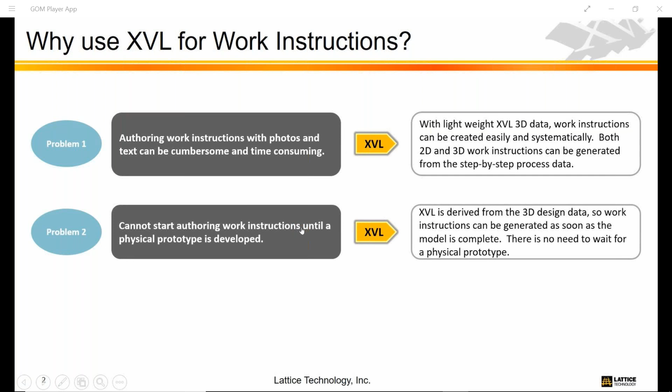Also, traditionally, you can't start authoring the work instructions until there's a physical prototype to be photographed. But XVL is derived from the 3D design data, so work instructions can be generated as soon as the model is complete. There's no need to wait for a physical prototype. Also, traditionally, it's difficult to update work instructions when the design changes, and difficult to reuse work instructions for different models. But Lattice tools make it easy to update XVL-based work instructions when the design changes, and to reuse the same instructions for different models.

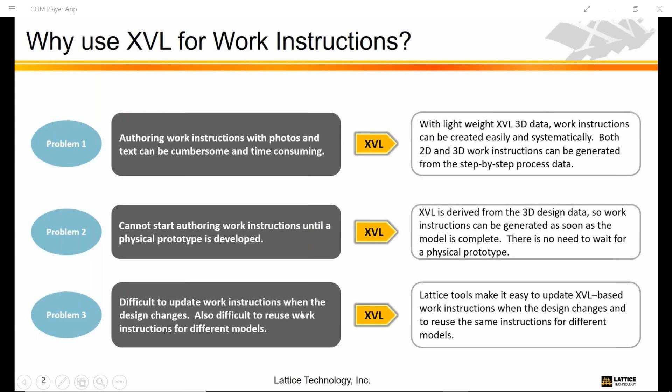So how do you create work instructions with XVL? Well, the first step is to convert the 3D design data into the lightweight XVL format. From there, you're going to create a process tree. As we will see, this enables you to easily create 3D animations and 2D illustrations, as well as to publish 2D and 3D documents, and then also easily update the model and the process data when the design changes.

The first step is to create the process tree, which is a step-by-step list of tasks. These tasks contain detailed text instructions, parts lists, and additional attributes.

You can use the process tree to create 3D animations or 2D illustrations. Once you've authored all of these, you can save them back in the XVL file, and use this XVL file with other Lattice tools to publish your 2D and 3D documents. These can be in Excel, HTML, or 3D PDF format, and viewing is free with the XVL 3D viewer.

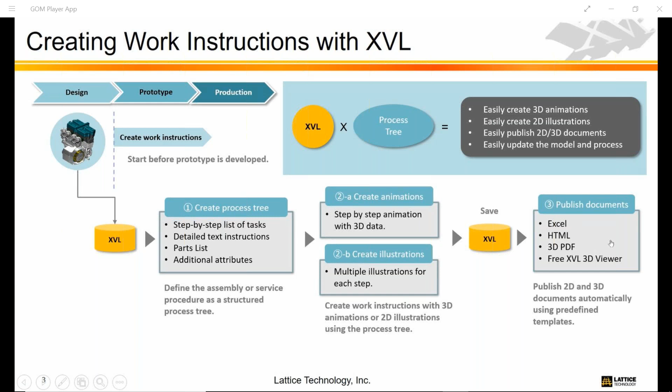Finally, when there's a design change, you can use the Lattice tools to auto-update the XVL model and the process data.

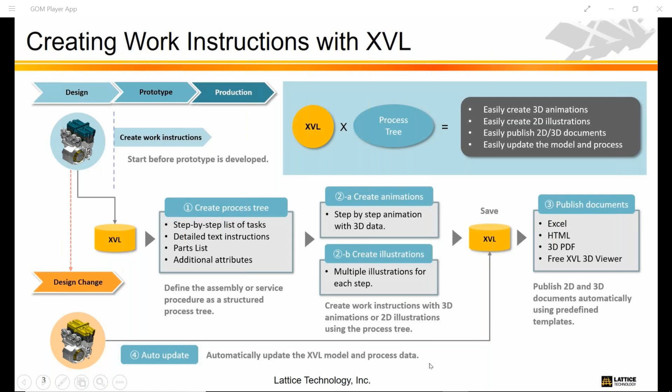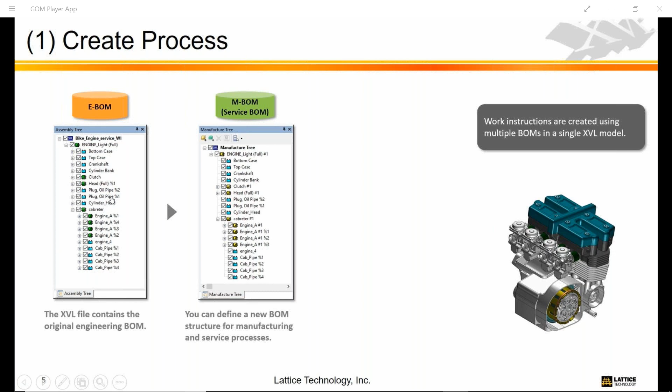The first step is to create the process tree. When a file is converted to XVL, it contains the original engineering bill of materials. Lattice tools enable you to define your own bill of materials that could be more appropriate for manufacturing or service processes. Once you've created your MBOM or service BOM, you can use this information to build the process tree, which is a step-by-step list of tasks to perform the procedure.

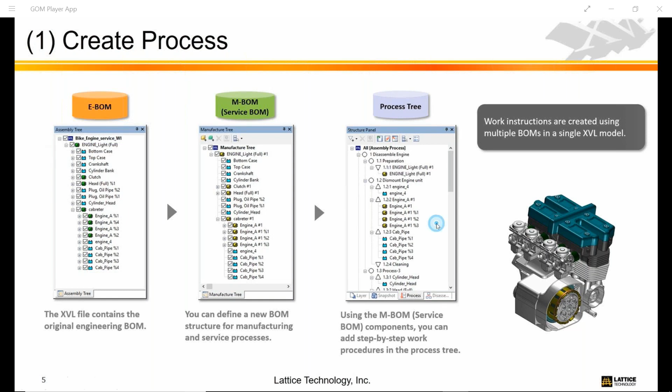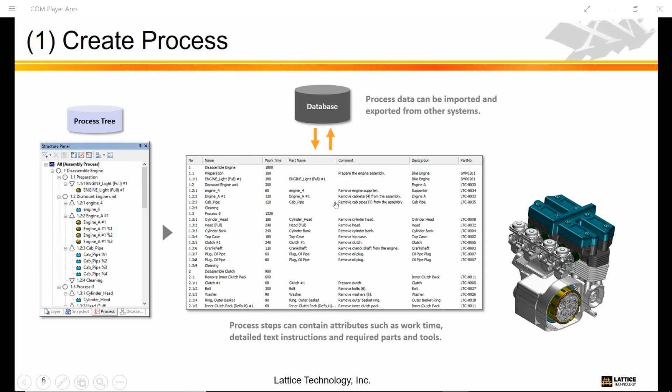The process tree contains not only the parts required, but also additional attributes such as work time, detailed text instructions, and required parts and tools. The Lattice tools allow you to author this information manually or to import and export this data from other systems. Let's see how this works.

Here we have a model of a bike engine in XVL Studio. We've just converted the 3D CAD data to XVL. So here we have the geometry and an assembly tree, or EBOM, but we don't have a manufacture tree, or MBOM. Let's go ahead and create one.

We can do that by simply dragging and dropping parts from the assembly tree, or EBOM, to the MBOM, and we can do that in any order. Or, if we like, we can initialize the MBOM as a copy of the EBOM. And here we have the whole thing here.

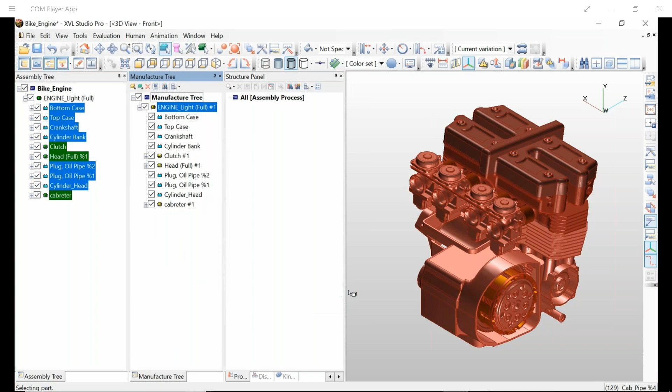No matter how we create the MBOM, it's independent of the EBOM, so any changes we make to the MBOM won't affect the EBOM, and vice versa. For example, if we want to rearrange parts, we can do that without affecting the order of parts in the original EBOM. We can also add manufactured parts specifically to the MBOM to represent things like consumables during the assembly process. We can also add specific manufactured assemblies to gather parts together into manufactured kits. And again, these changes to the MBOM won't affect the EBOM.

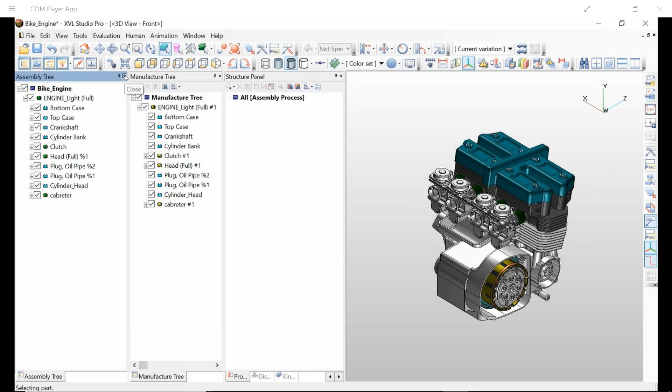After building the MBOM, let's go ahead and hide the EBOM since we won't be using it. Now let's go ahead and build the process tree. We'll start by adding a base process, and then we'll just drag and drop parts from the MBOM onto the process tree.

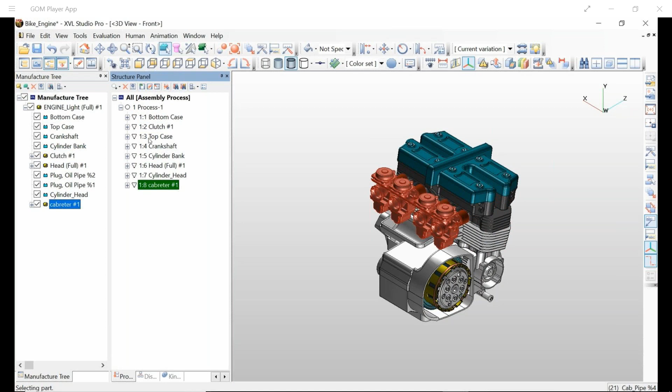We can do this in pretty much any order because we can easily check it later. All right, have we missed any parts? Sometimes it's hard to tell, so let's take a look and see. Okay, this tool tells us that we missed a couple of plugs here. Let's go ahead and grab those. And let's check it again. No items found. Okay, so we've now accounted for all the parts in our process tree.

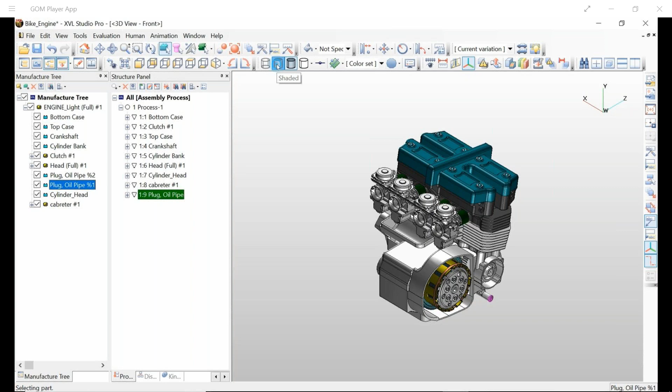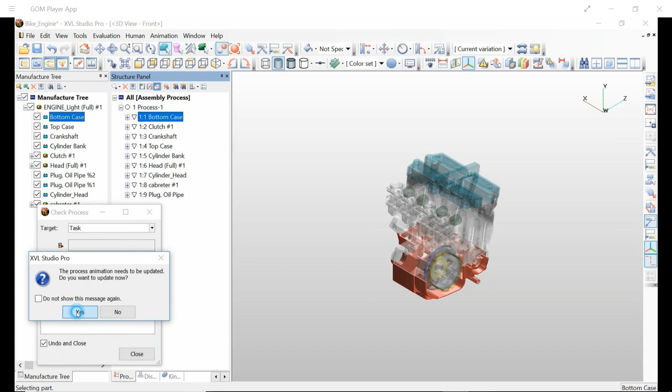Now let's check the order of operation. To do this, it's probably easier to visualize if we turn on opaque selection. Let's start here with the bottom case and step through the process. Okay, it looks like the crankshaft's out of order here. So let's close that and move it in the tree. Okay, start again. Okay, that's much better.

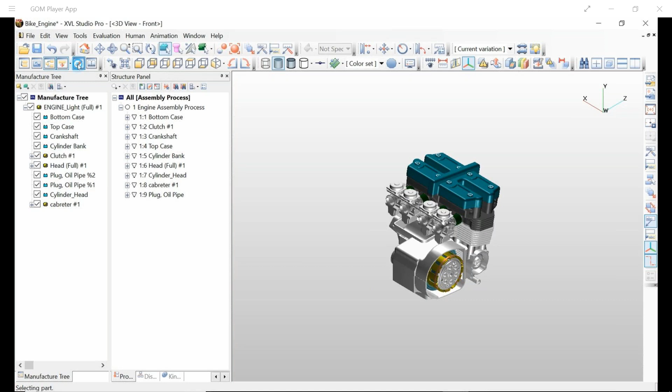When the process tree is complete, it gives us a step-by-step list of instructions for assembling the bike engine. Studio also allows us to add additional information to each of these tasks. For example, we can assign a work time for each task, and Studio will automatically add up the work time for the entire process. We can also author comments and instructions. Studio even allows us to import information from other systems, as well as export our process information to other systems.

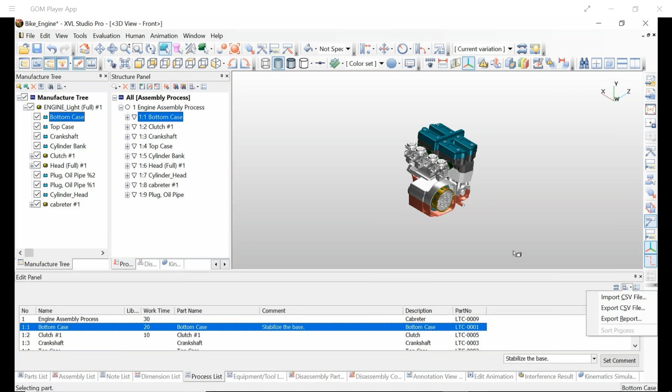After you've created your process tree, you can use it to create animations. Lattice tools make it easy to create step-by-step animations for processes. Simply move the parts and save the positions to create the animation path. You can even add images and text to the animation, and animated components can be highlighted during playback.

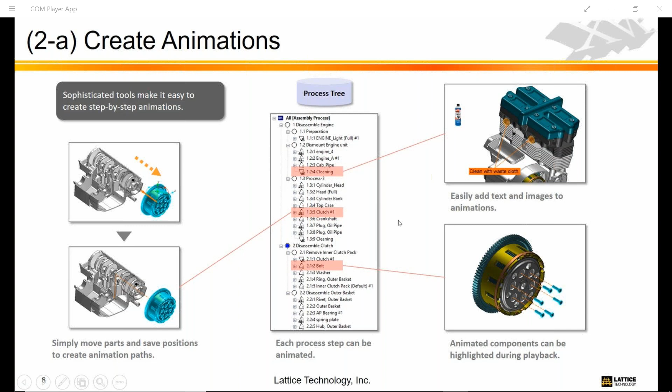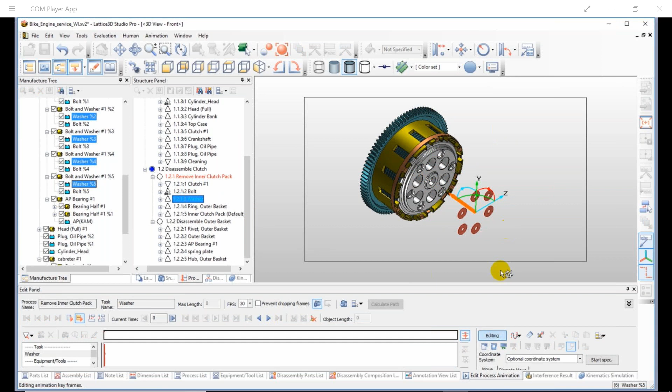Here we're defining an animation path by moving a part and saving points. We took the engine top off, going up and sideways, and now the animation follows that path. Here we've extracted the bolt, and the washers, and now the ring. You can also add images and notes to your animation.

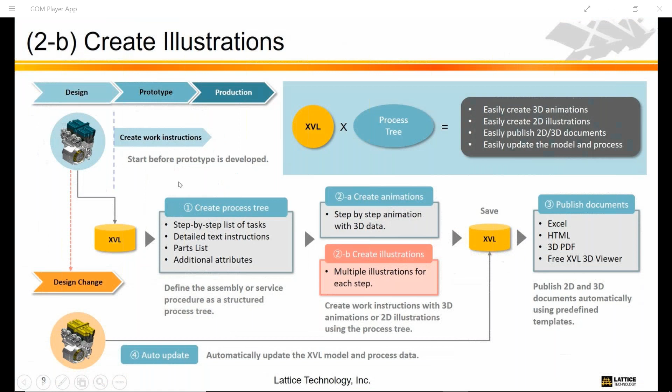The process tree can also be used to create illustrations. Lattice makes it easy to create 2D illustrations from the 3D model. Simply move the parts to lay out the illustration. You can also easily add notes and images to the illustration.

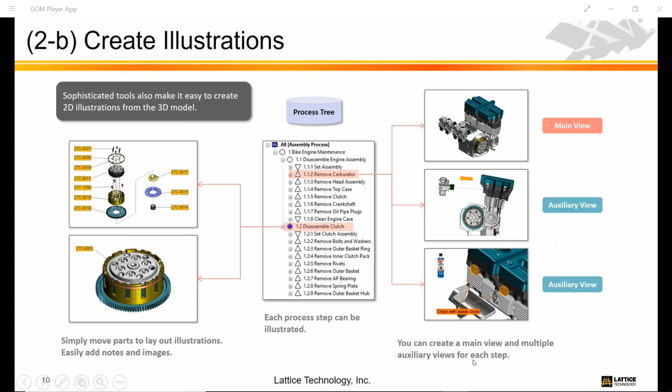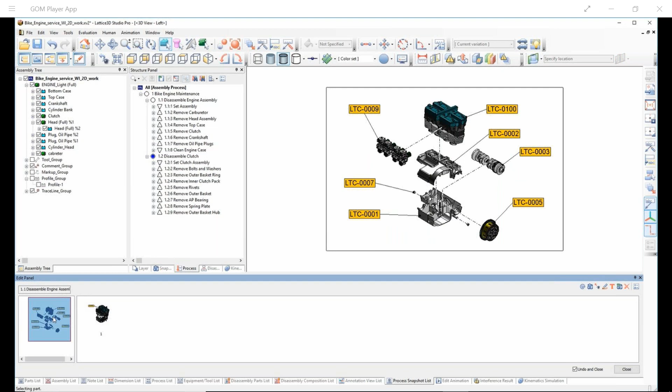Within the process tree, you can create a main view and multiple auxiliary views for each step. Here are some examples of creating illustrations in Studio. You can see you can move parts, add notes, and even create cross sections for your illustration. And each process step can have a main view and multiple auxiliary views.

After you've created your process tree, okay, let's go ahead and pause it right there.

Mark, do you have any additional polling questions? Let's see if I can operate this one right. So if you could take a minute, let us know what CAD system you use. And if you don't know, just select other or you don't know, if it's not one on the list. I'm going to let this go for just a couple more seconds. And the people at SOLIDWORKS are going to be glad to see this.

So 38% using SOLIDWORKS. Okay, very good.

And let's do one more, Mark, and then resume. Mark just talked about creating these assembly work instructions, the MBOM, all that's tied together. So how do you currently create assembly work instructions? Are you using general purpose tools, Microsoft Word, Excel, PowerPoint, Adobe, or are you using tools from your CAD or PLM supplier, MES tools, or other?

Okay. A lot of you are using general purpose tools. Give this just a couple seconds more. Looks like that's pretty much it.

And let me share those results. So a lot of people, as we find, oftentimes are using just how do we create this documentation? We just use common tools, cut and paste, and build them out. So Mark, I'm going to hide this poll, and it should be back to you now. Here we go. Okay, thanks, Mark.

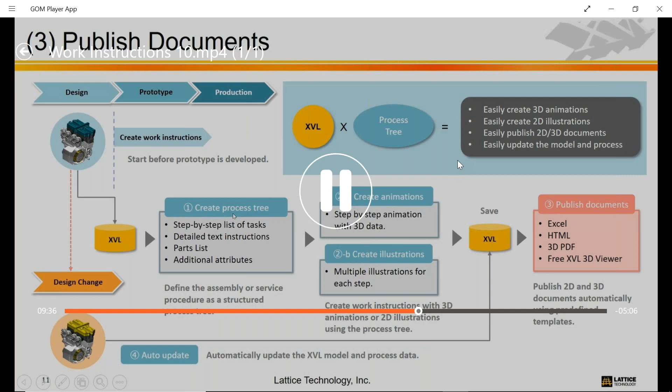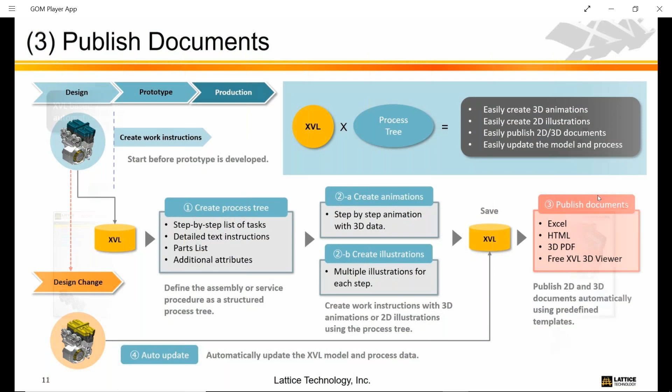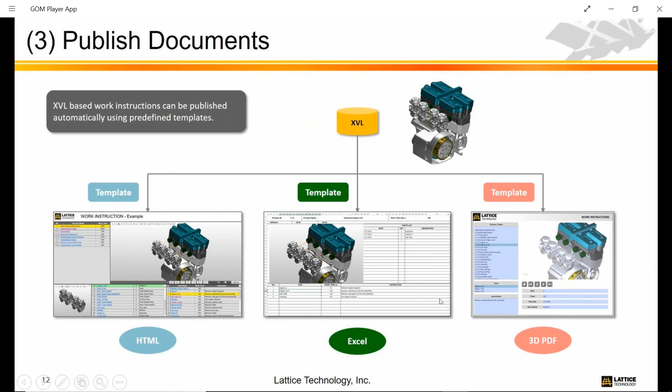Let's continue now. Authored 3D animations or 2D illustrations, you can save all this information in the XVL file. Then you can use this XVL file with Lattice tools to publish your 3D or 2D work instructions. Lattice tools can automatically publish work instructions using templates in several different formats, including HTML, Excel, and 3D PDF.

Here's an example of 3D work instructions in HTML. All of the views are cross-linked to each other, so selecting in one highlights the part or the part information in the other views.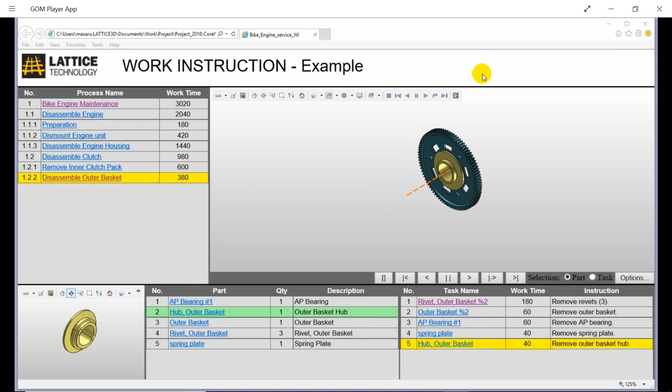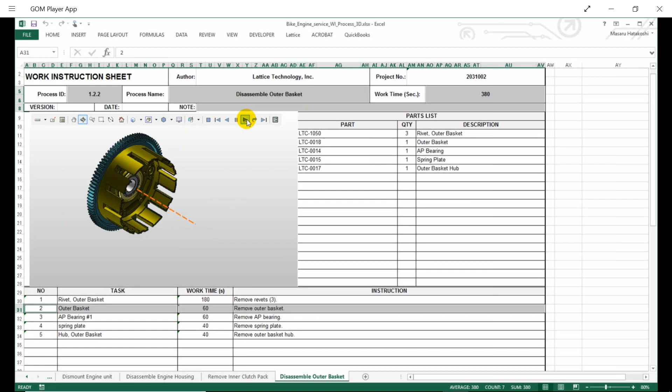Here's an example of 3D work instructions in Excel. Again, you can see an animated 3D view as well as parts information and process list. As the animation plays, the different process steps highlight.

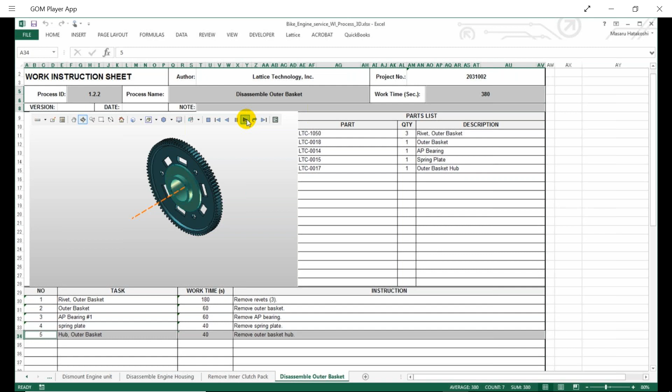And here is the same animation in 3D PDF. Again, there's cross-highlighting between the different views, the process list, the 3D view, and the parts list.

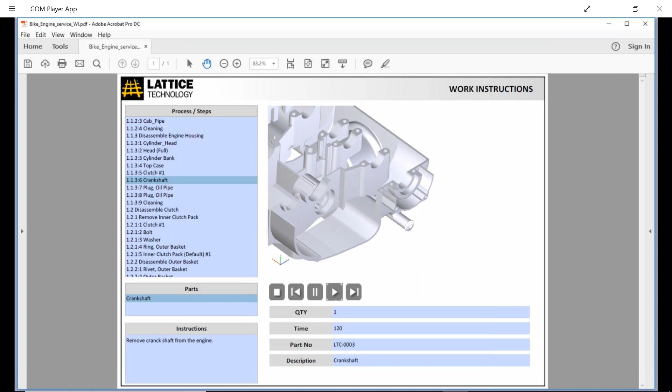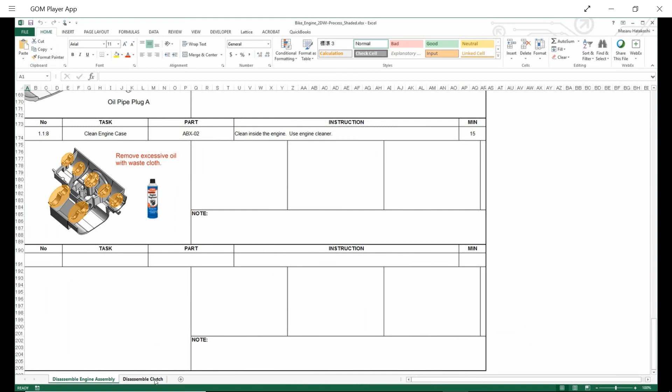Here are 2D work instructions published as an Excel document. It contains illustrations, parts lists, and other information. There is still a 3D model behind the scenes here, so you can pop out a 3D view and select in the view, and it will be cross-linked to the 2D document.

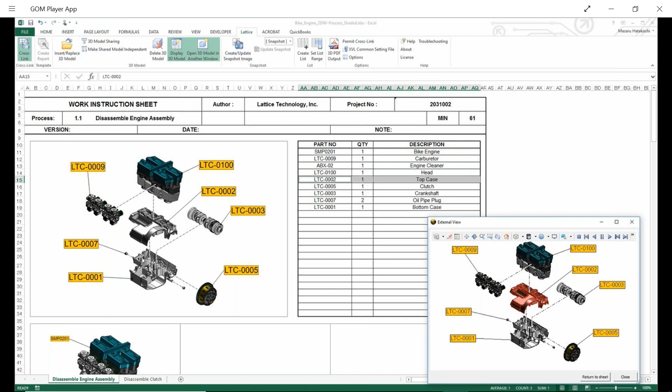And here is the same work instructions published as a 2D PDF file.

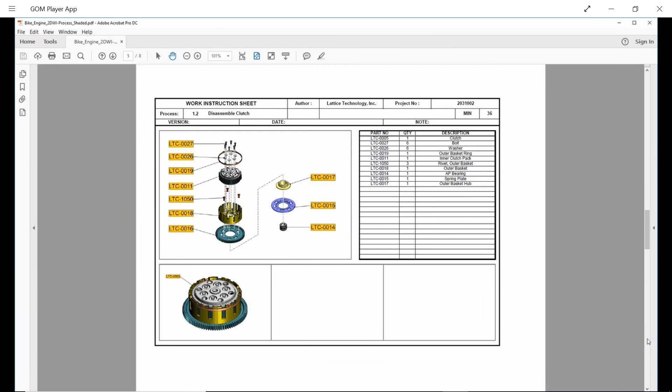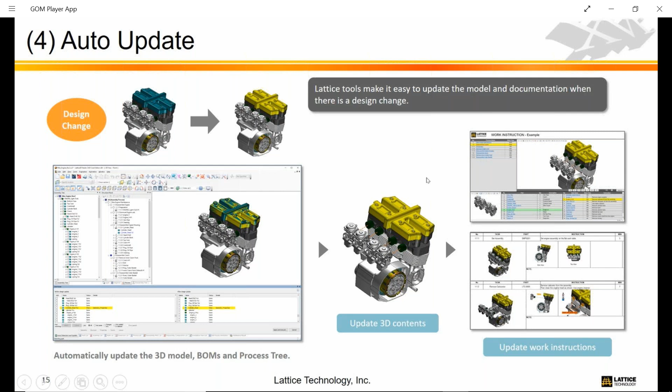Finally, when there's a design change, Lattice tools enable you to auto-update the model. You can convert the new version of the model to XVL and then use Lattice tools to automatically update that model to add the bills of materials and the process information you authored previously. Once that's in the new version, save the XVL file and then use the publishing tool to automatically update the work instructions for the new version.

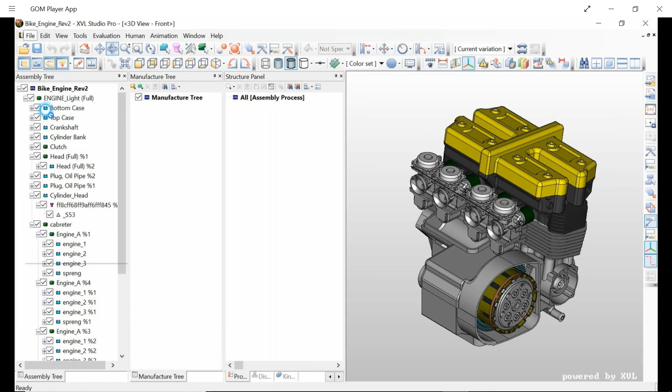First, we specify the file containing the previous version. And then we have Studio do a part-by-part comparison of the previous version and the current version. The results are shown here. As you can see, most of the parts are the same. We can scroll through all of this, or we can filter this list to only show parts that have changed.

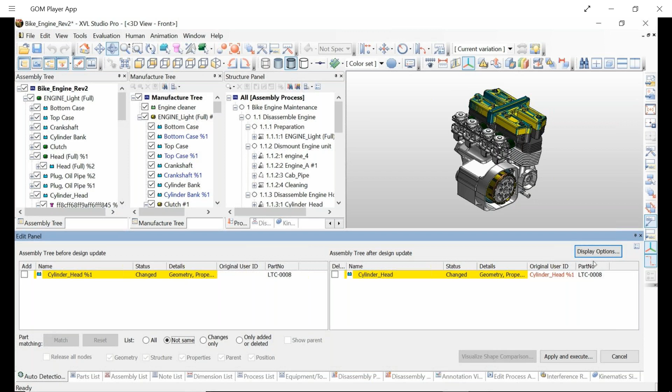In this case, only the cylinder head seems to have changed, and specifically what's changed are its geometry and its properties. You can see one of the different properties highlighted in red. Let's take a look at the geometry though, and see what's different. We can do a visual shape comparison of the model here, and it'll show differences in red and green, whereas similar surfaces that haven't changed are shown in yellow.

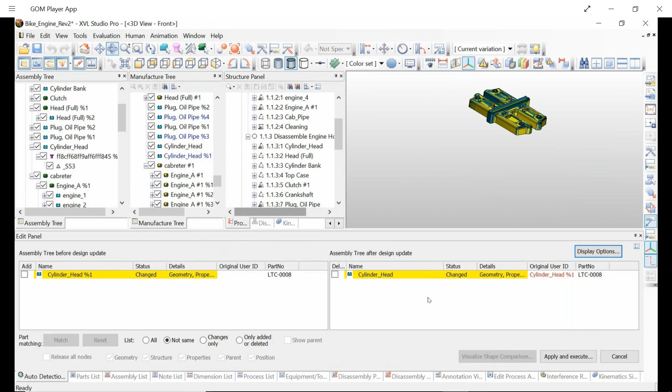Once we're satisfied with the match, we can go ahead and complete the auto update. And here we have the second version of the model with the MBOM and the process tree that we've authored previously. Let's just go ahead and check the animation and make sure it's still working.

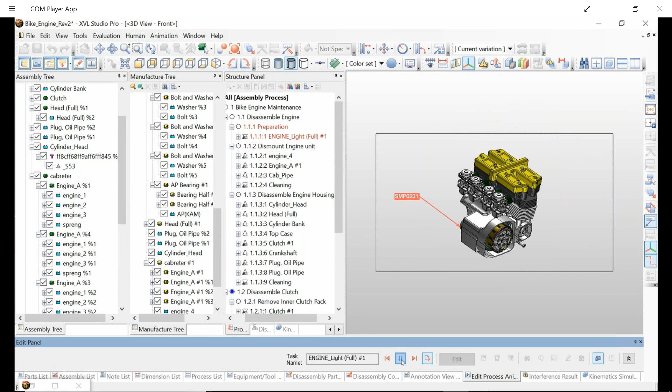Yes, this looks like the process animation we created earlier. So you can see now with just a few clicks, we're able to auto-update the new version of the model with all of the work that we did previously. That eliminates the need to do rework whenever there's a design change.

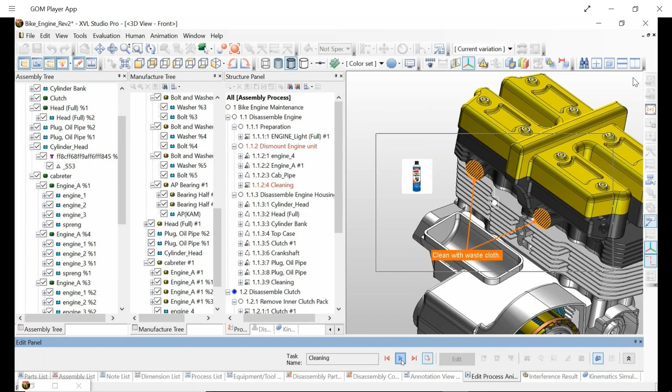Okay Mark, that's basically a summary of what we've shown here today, which is the ability to create work instructions from any CAD data using XVL. Now back to you. Perfect. Any CAD data, doesn't matter. And we've got a question coming up about that. But first, let me do one more poll.

This will be the last poll, you guys. So Mark talked about the creation of assembly work instructions and then deploying them. So in your current environment, how are you deploying these work instructions that you create? We saw most people using general purpose tools, and how are you getting them out to your shop floor? The 2D here specifically, PDF is an example, and then specifically if you're doing 3D, PDF is the third choice, and then other electronic, 3D electronic if you're not using 3D PDF. Let me give it just another second here.

We'll close the poll, share the results. So some paper, that is very surprising to me. Thanks for sharing that. And then the 2D PDF isn't a surprise. 3D PDF is a format that we support, and a lot of people don't even know the standard Adobe Reader that you have on your machine supports these 3D PDF documents. So we actually have samples on the website you can download, and you can see a 3D PDF in action with what you have installed.